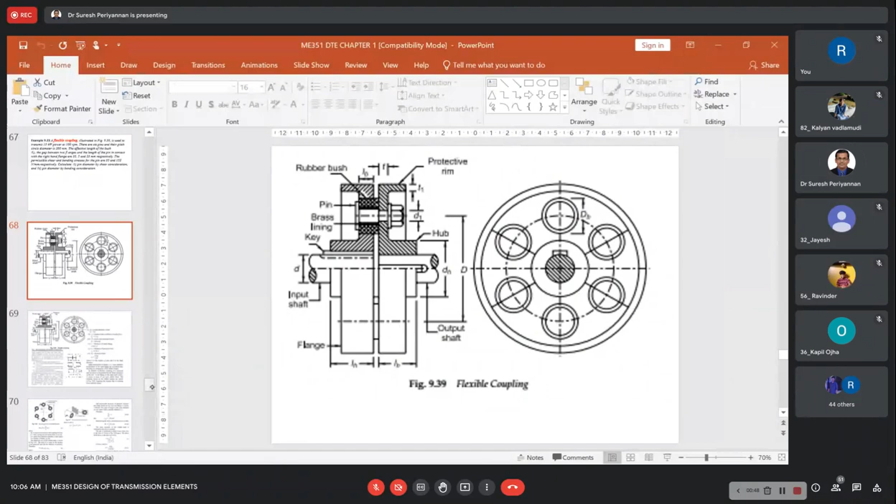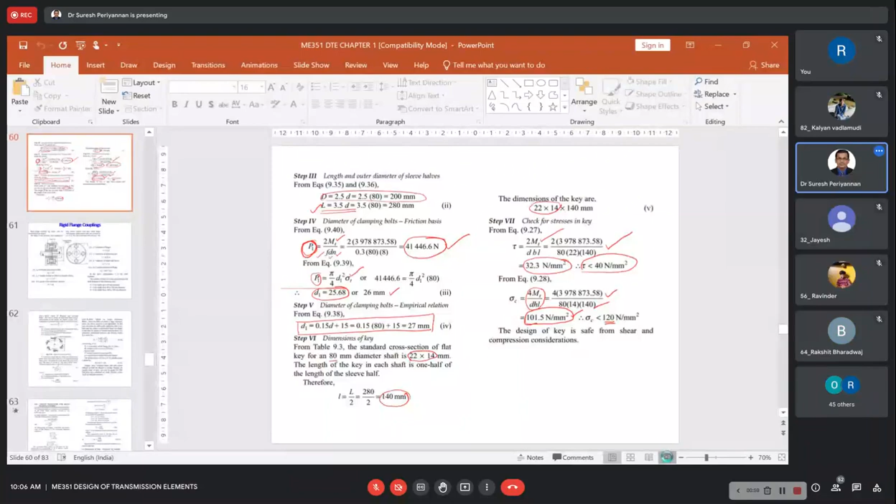Are you able to see my presentation mode? Visible, yes sir. Okay, we discussed last class coupling, basic principle, and different types of coupling. In the difference of type of coupling, we discussed the sleeve coupling and this.

Clamp coupling, sleeve muff coupling and split muff coupling. We discussed the concept and the corresponding design problem also we discussed.

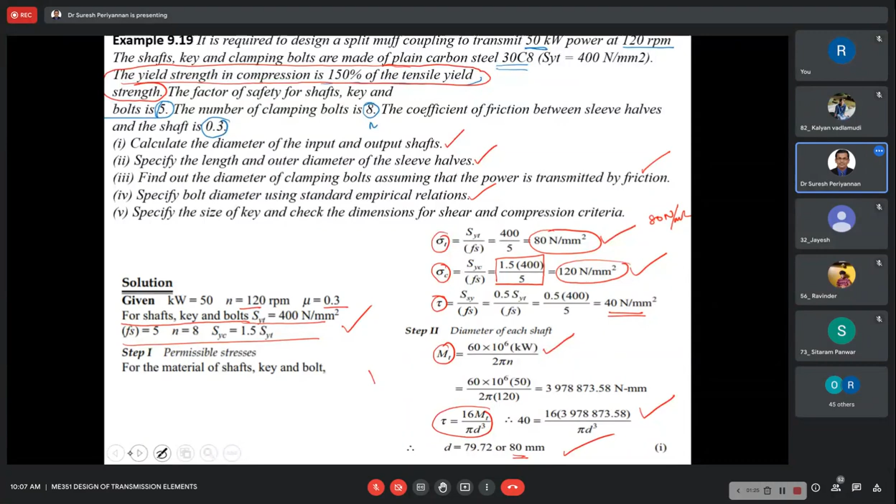Today we move to the next coupling, a rigid flange coupling. Whatever we discussed yesterday, that coupling, sleeve coupling and

clamp coupling, both are rigid type. Those couplings we cannot use wherever shock and vibrations are present, we can't use.

Wherever alignments are necessary, due to error in manufacturing input shaft and output shaft from the motor and pump, in those places we can't use this type of coupling.

So even rigid coupling, flange coupling also we can't use, because this flange coupling also comes under rigid coupling. But later we are going to discuss the flexible coupling.

In the rigid coupling, we are going to do small modifications. Those modifications will help us get a flexible coupling. Flexible coupling in that sense can be used wherever vibration and shock occur.

Those places can be used. So first, today we see this rigid flange coupling. This is also under rigid coupling.

Now, before entering into this, we will see some basic theories, and then we go for the derivation and we move to the problem. Okay, so some of these points I note down.

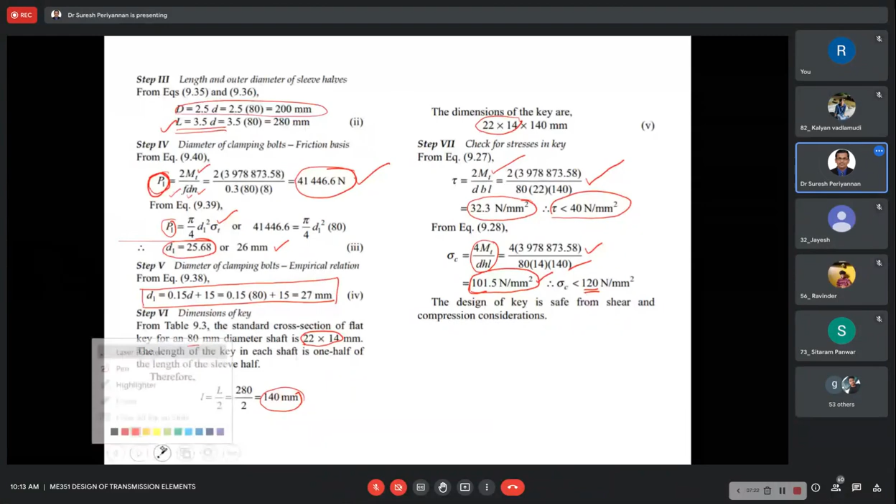In the last class, we discussed unprotected flange coupling and protected flange coupling. See here, this is unprotected flange coupling. I told you the reason why, I mean why unprotected coupling and protected coupling.

Here, the revolving bolts, heads and nuts are dangerous to the operator when this coupling is transmitting power from driving shaft to driven shaft. Because, suppose any one of the bolt or nut fails or gets broken, then this bolt and nut with very high force will be spread onto the operator's body. Hence, we would like to avoid such an incident.

Hence, we are providing protecting circumferential rims in the flange. Even if the bolts and nuts fail, they cannot be spread with high force and cannot impact the operator. Hence, we use this kind of protecting circumferential rim, and this is the protected type flange coupling. But the design procedure for both is similar, no different. However, this one is a little more complicated to design compared to the unprotected type flange coupling.

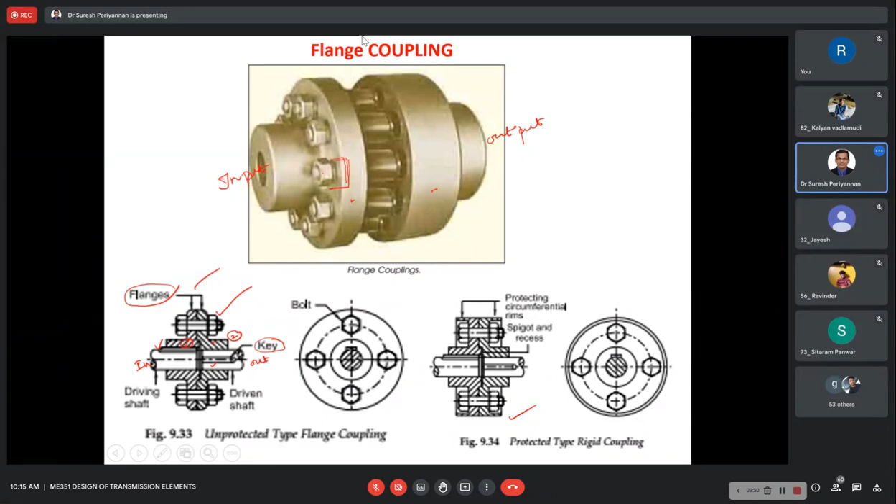Okay, but otherwise the design procedure is the same. Hence, in our discussion, we are only going to consider the protected type flange coupling. Now we go for the design procedure. Now see here, this is the protected flange coupling. In this protected flange coupling, one by one we will see.

Now, what are the advantages? This type of coupling can transmit high torque. It can be easily assembled and disassembled. And what is the disadvantage? There are many advantages you can easily understand if you go through the books we referred, especially Bhandari.

Now see here, these are some disadvantages. It cannot tolerate misalignment between the two shafts, that is one disadvantage because it's a rigid coupling. It can be used only where there is motion-free, vibration and shock-free conditions. It requires more radial space compared to sleeve coupling, muff coupling or clamp coupling, and it is a little more complicated design compared to muff or sleeve coupling.

Now see, this is the design procedure. What component did we discuss now, and how are we designing the concept? We discuss the concept, then we go for the problem. Now, rigid flange couplings are widely used for transmitting large torque. Now the flange is a protected type coupling.

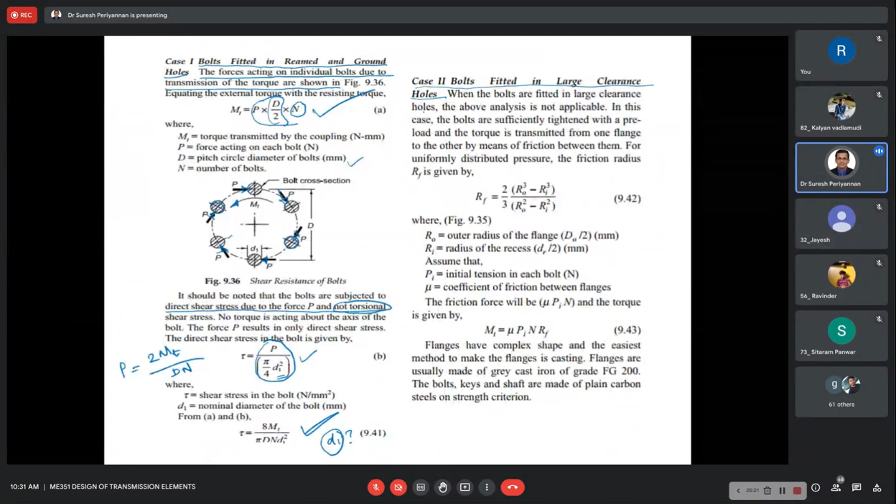Second case, free holes - the other side, even if tight fit, people may use bolt and nut, doesn't matter, for the safer side, for safe power transmission. But when we are using loose holes, meaning holes with large clearance, then a nut is a must.

Then on the other side of the bolt, we are using the nut with a preload condition. We are applying the preload for tightening the nut and bolt. Then the flange is going to be securely fitted on the shaft. Now see here, the torque is transmitted from one flange to another flange.

Torque is transmitted from one flange to another flange by means of friction between the flange surfaces, because the flanges are tightly held. Okay, now this is uniform pressure, this uniformly distributed pressure.

But this formula, keep in mind, this uniformly distributed pressure concept we are going to discuss in the clutch. At that time you can understand. I will give you some explanation about the friction radius, more information about friction radius. Now just remember this formula.

2 by 3 into R naught cube minus Ri cube divided by R naught squared minus Ri squared. What is R naught? R naught is nothing but outer radius of the flange, D naught by 2. Outer radius of the flange, this one, D naught by 2. Now, Ri is the radius of recess, dr by 2. Where is dr? This is dr.

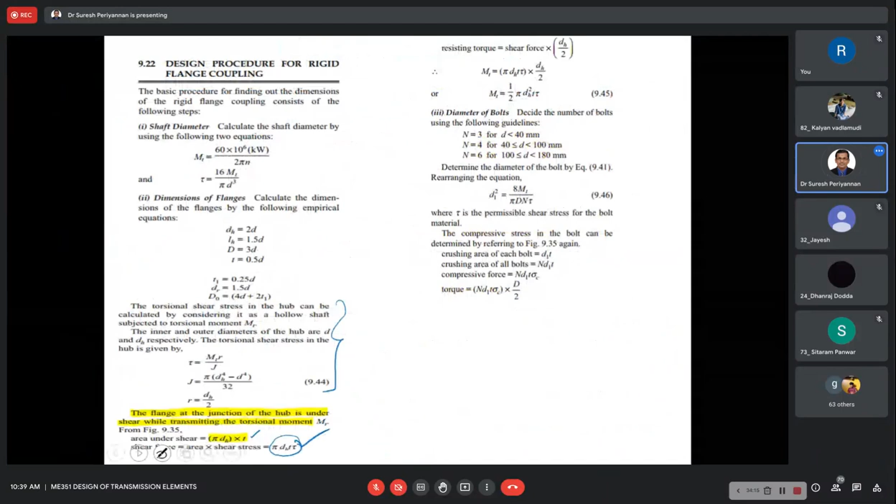Now what is the resisting torque in this junction region? Resisting torque into dh by 2 - this is the resisting torque at the junction. Then, simplifying, Mt is equal to 1 by 2 into pi dh squared into t into tau. Are you clear?

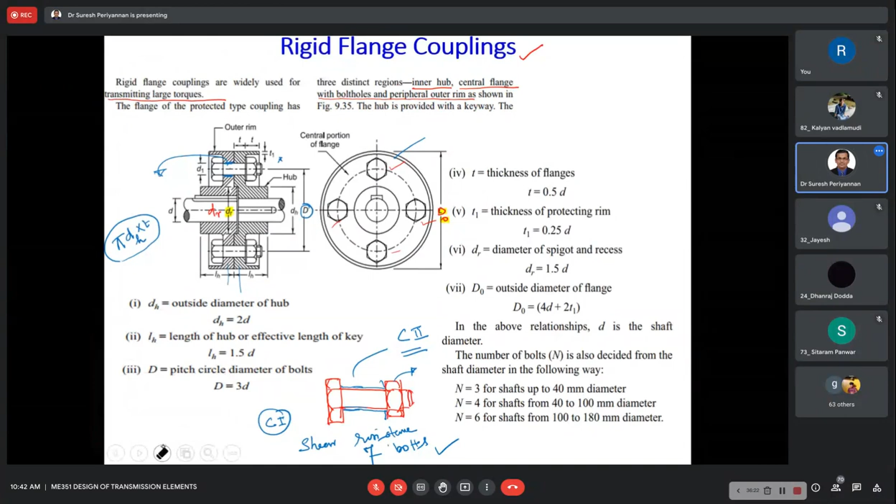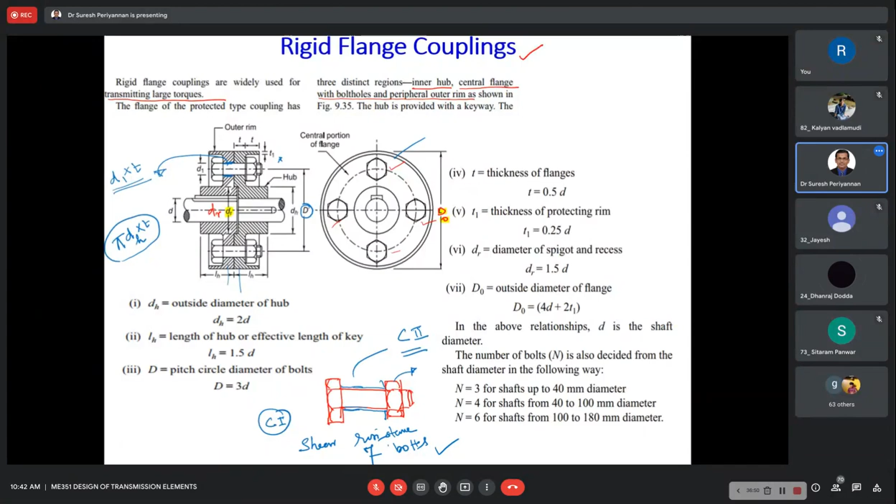What is this projected area? This diameter - D1, because bolt diameter - the projected area is D1 into T. This is when we tightly insert the bolt. This flange surface is going to be subjected to crushing stress, and hence we find this based on crushing stress, and we are able to design the coupling. So, D1 into T.

One minute - yes, tell me, someone is trying to ask a question.

So this is D1 into T. Now how many crushing areas are there? Number of bolts, N, into D1 into T. Now what is the torque due to resisting crushing force, due to crushing stress? N into D1 into T, the total crushing area, into crushing stress gives you the crushing force, then into D by 2, which is the pitch circle diameter of the bolt, gives you the MT - the resisting torque with respect to crushing stress. Are you clear?

Someone, can you mute? If you have a doubt, please go ahead, because your mic is making noise.

Shall we go to the problem? Yes, please sir. Okay, finally here also we are using keys.

In the keys - once we know the diameter of the shaft and the length of the key, we can get the key dimensions from the standard table, whatever we discussed yesterday. Then we have to identify whether the actual key stresses - actual tau and sigma c, the crushing stresses and shear stresses of the keys - are within permissible limits.

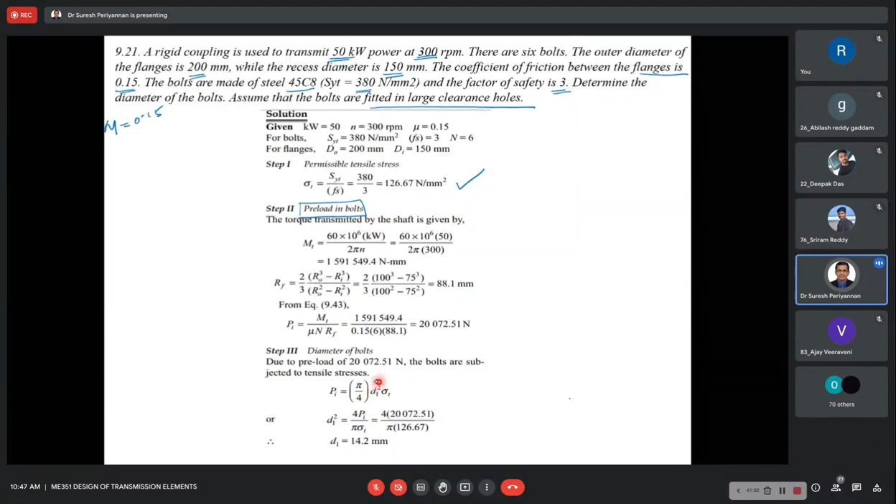Now diameter of the bolts. Once we found pi, pi is nothing but the tensile force applied while tightening the bolt, preloaded. Now pi is equal to pi by 4 into d1 squared sigma t. This is because the bolt is subjected to tension. From this relation, we are able to find out the diameter of the bolt. Diameter of the bolt is 14.2 mm. It's a very simple problem.

Now I come to the second problem. It is required to design a rigid type flange coupling to connect two shafts. The input shaft transmits 37.5 kilowatt power at 180 rpm speed to the output shaft through the coupling. The service factor for the application is 1.5, that is, the design torque is 1.5 times the rated torque. Select the suitable material for the various parts of the coupling. Design the coupling and specify the dimensions of the components.

This simple problem is the same problem from the Bhandari book, and here they have given justification for selecting the material. How to select the material? Please go through those points, you can get more information. I'm not putting those points here, please just refer to your book. This is how they are choosing the material. They gave the justification, you can understand.

Now this is a standard procedure. First we consider the shaft, the permissible stresses in the shaft. This is a standard procedure, whatever we discussed in enough number of problems. How to define the permissible stresses: permissible shear stress, permissible crushing stress, permissible tensile stress. We already discussed many problems on how to define this. Similarly, we define here for the shaft material.

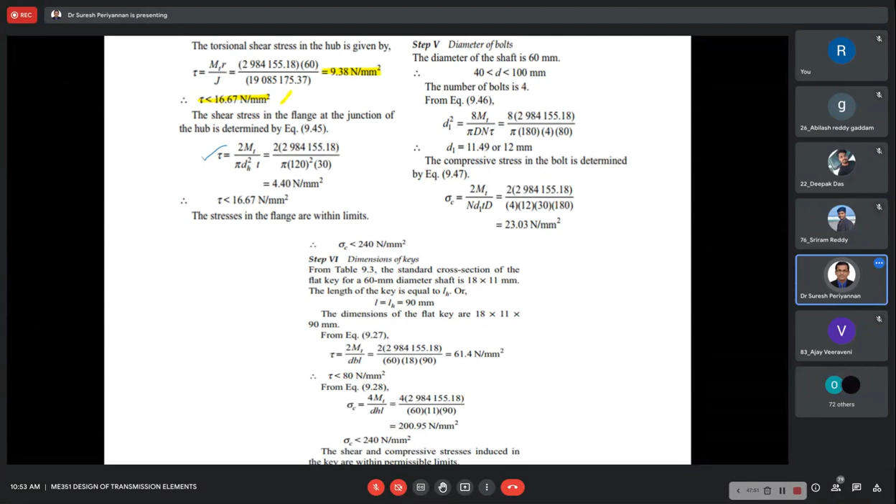Tau is equal to 2mt divided by pi dh squared t. From this we have found that the tau at the junction of the flange is 4.4 Newton per mm squared. That is also less than the permissible value, hence this is within the safe limit.

Now, one by one, coming to the next step: diameter of the bolt. What is the diameter of the shaft here? Diameter of the shaft is 60 mm. Based on our standard empirical condition, we take the number of bolts as 4. We already discussed this - up to 40 mm shaft diameter we can take 3 bolts, but more than 40 mm diameter of shaft, we use 4 bolts.

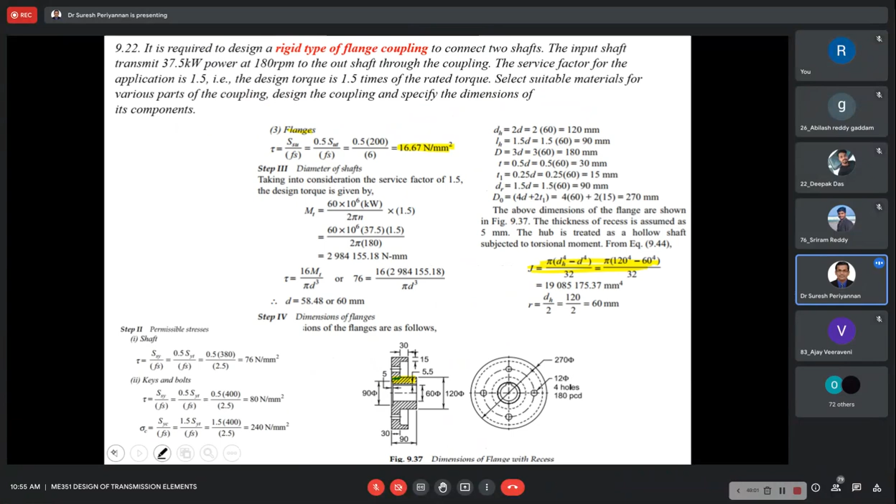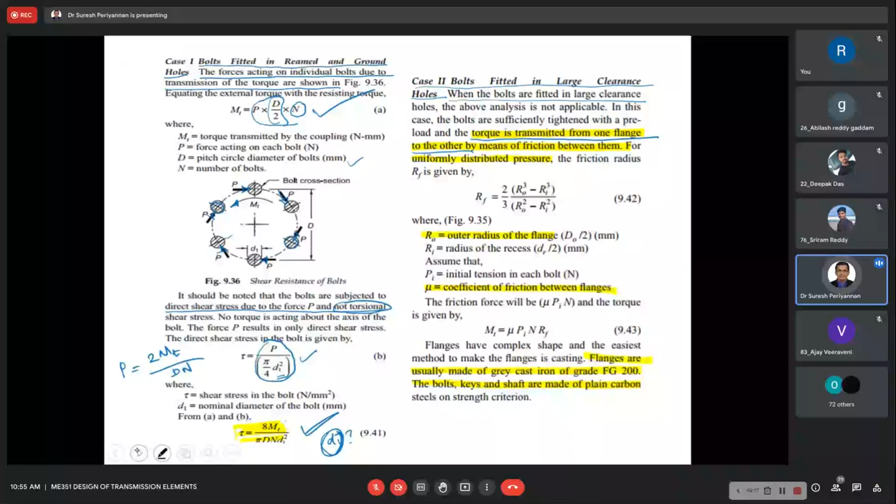Now this formula we already discussed: 8mt divided by pi d into n tau - this is the formula with respect to resisting force. Let me recollect this information. Case 1: 8mt divided by dn into d1 squared. From these relations we are able to find out the diameter of the bolt.

Now, compressive stress on the bolt - to determine compressive stress: 2mt divided by n d1t, which is sigma c. From this our compressive stress is 23.03. Now we verify whether the compressive stress is within the safe limit or not. Our compressive stress permissible value is 240 Newton per mm squared, and our actual value is 23.03 Newton per mm squared, so we are within the safe limit.

Now finally, dimensions of the key.

Length of the key, from the standard empirical relation, we can find it. Based on this diameter of the shaft, we can find out the dimension of the key from the table: 18 into 11 mm key can be used.

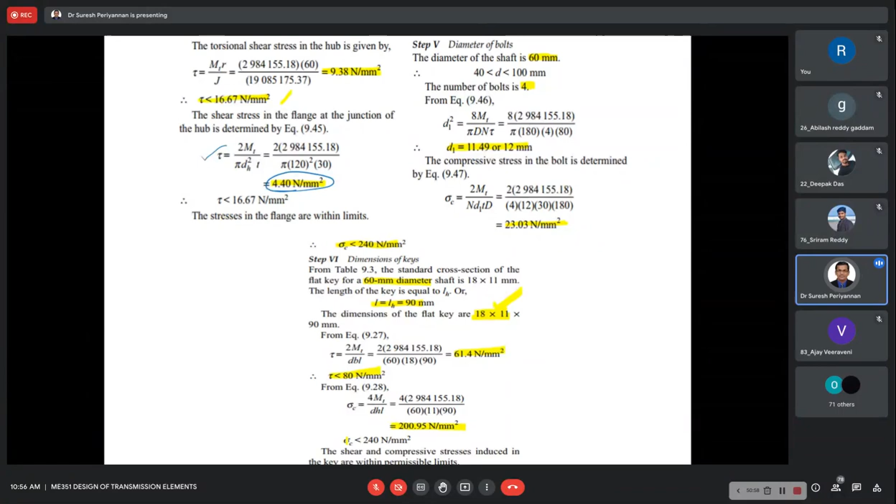Once we are using this standard dimension for the key, we have to verify whether the key stress limits are exceeding or not compared to the permissible stress value. 2MT divided by dbl gives the actual tau, but our permissible value is 80, hence it's within safe limit. Now this is actual sigma c, our permissible value is 240, hence our design is within the safe limit only.

Okay, now I come to this bushed pin type flexible coupling. Just we discuss the concept, and the problem we may discuss in the next class.

Do you have any doubt in the earlier problem, please? No doubt, sir. Thank you, thank you.

Bushed pin flexible coupling. See here, as I told you, the rigid coupling, the flange coupling we discussed earlier, that is a rigid coupling. There are some modifications we are going to do to convert it into a bushed pin flexible coupling, right?

Rigid coupling can be used only when there is a perfect alignment between the axis of the two shafts, and also only where the motion is free from vibration and shocks. Those places only, rigid coupling is possible.

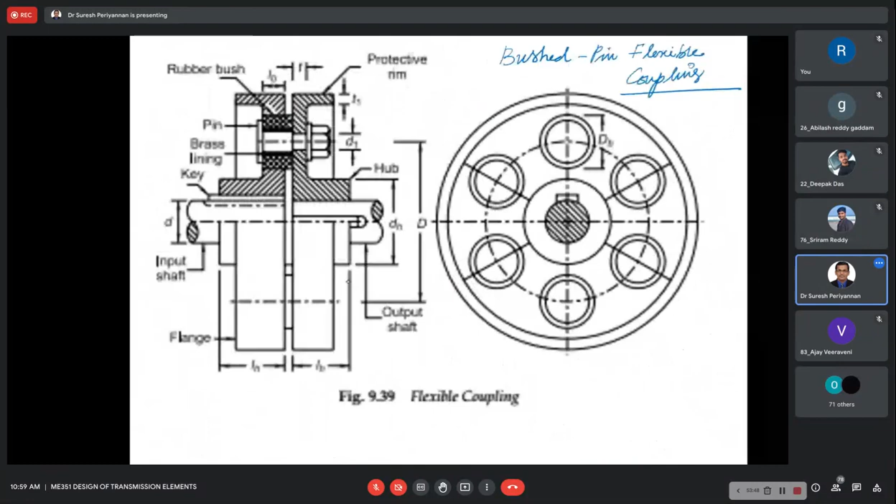The two flanges, in this bushed pin type flexible coupling, are similar to a rigid coupling, but we are using here pins, bush and linings. Here is the pin, a bush, and lining - brass lining - we are using with the bolt.

When we add this kind of design and components, then the lateral and angular misalignment can be easily absorbed by this coupling, and smoothly the power transmission can be done. Also wherever there are shocks and vibrations, that can be easily absorbed by this kind of arrangement.

Bush, when we are using a rubber bush, brass lining, and pin along with this flange coupling, then it becomes a bushed pin type flexible coupling. The name itself comes from using bush, pin and lining along with the flange coupling to make it a flexible coupling.

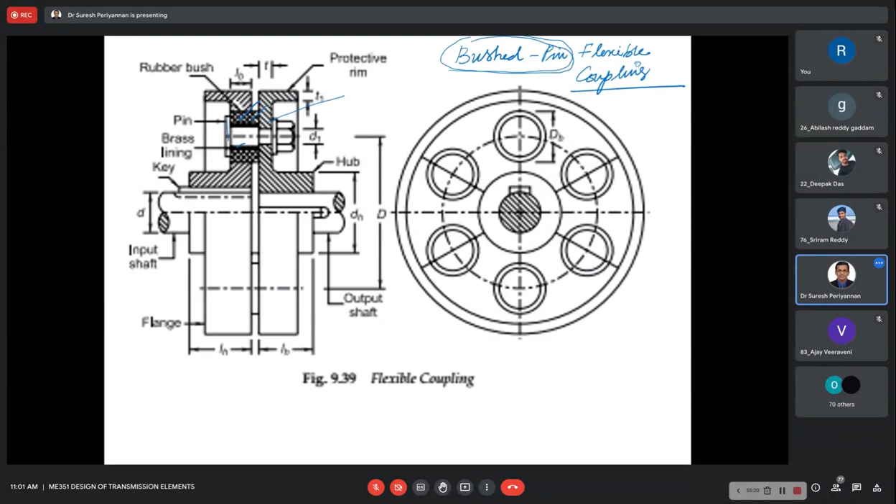Now, one end of the pin is fixed with the output flange or shaft with the help of a nut. The diameter of the pin is enlarged as per the input flange. Here, this is the pin.

Now the rubber bush is mounted over the pin. The lining, a liner, is provided in between the pin and bush. Here, this is the lining surface, brass lining. For example, this is the bush, rubber bush, and this is our pin.

Then we are using, on the right hand side, a nut to securely connect this pin, and simultaneously to securely hold these two flanges.

Now the power is transmitted from the input shaft to the input flange through the key. Then power is transmitted from the input flange to the pin through the rubber bush and the lining surface, liner.

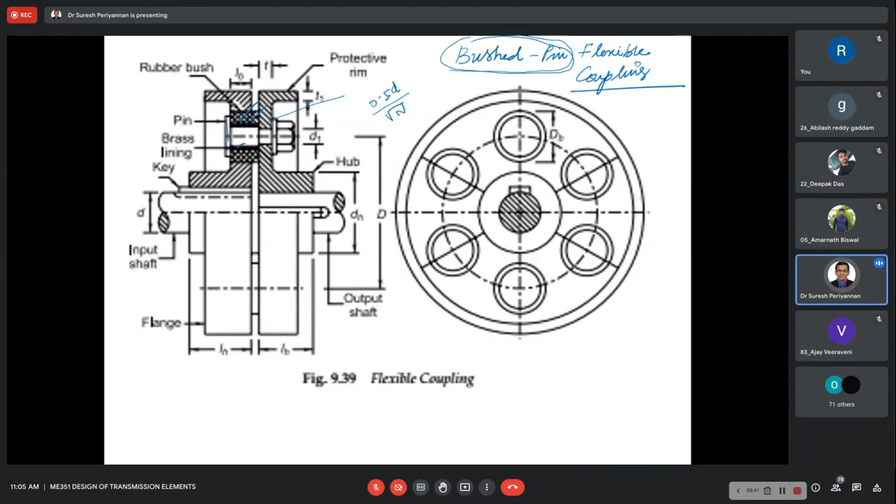D1 is nothing but 0.5d divided by square root of N — that's the diameter of the pin. These are standard empirical relations we are using for finding the dimensions of these 7 components.

Now, in the flexible coupling, it's assumed the power is transmitted with the shear resistance of the pin. This is very important — shear resistance of the pin.

As the input flange rotates, I already told you the power transmission order. As the input flange rotates, the force exerts a force P on the rubber bush.

When the force P exerts on the rubber bush from the input flange, that resisting force of the rubber bush is transmitted to the pin. Then through the pin, the force is transmitted to the right hand side flange, and then the power is transmitted to the output shaft through the key.